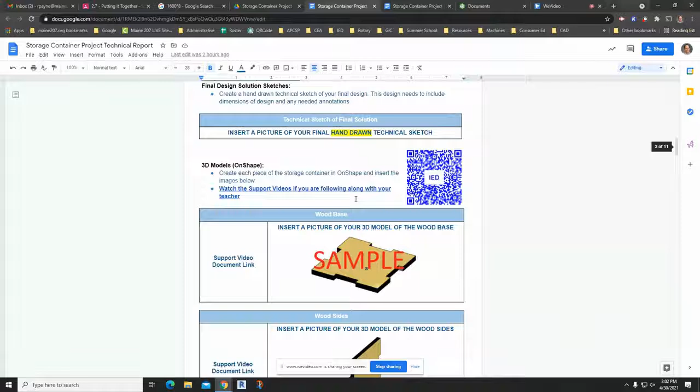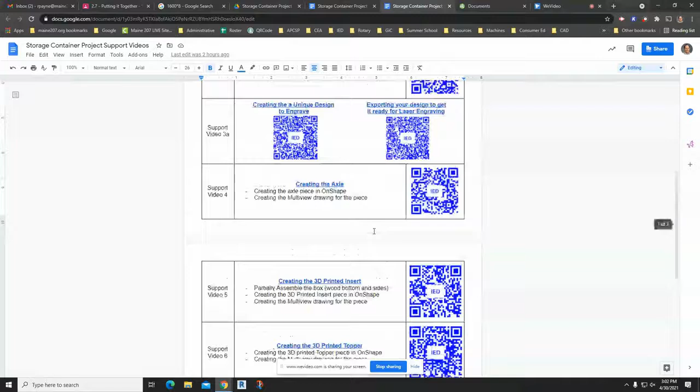So now we are finally ready to do the assembly in Onshape for our box. We've already done part of the assembly. If you need to find that, it's back in this video here, the 3D printed insert. We assembled the bottom part of the box, the wood bottom and the sides. If you have any questions about that, go back to this video here.

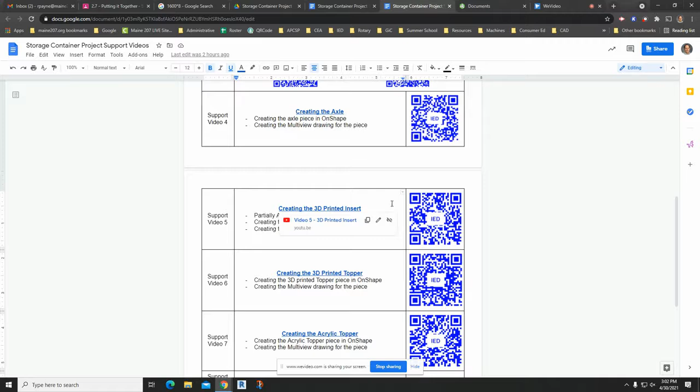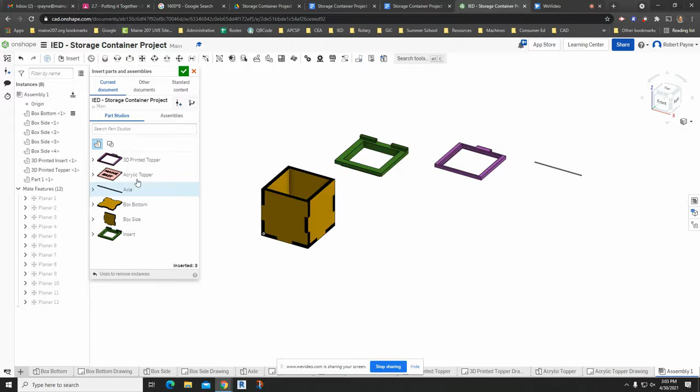Otherwise, we are going to just pick up from there. You'll see when I go to the assembly here that I have the base put in. So here's the front, and now I'm just going to put in the insert, the axle and the hinge and everything, make it all work. So I'm going to put in the insert first. Then I'm going to put in the 3D printed topper. I'm going to need the axle to help connect everything, and then the acrylic piece as well.

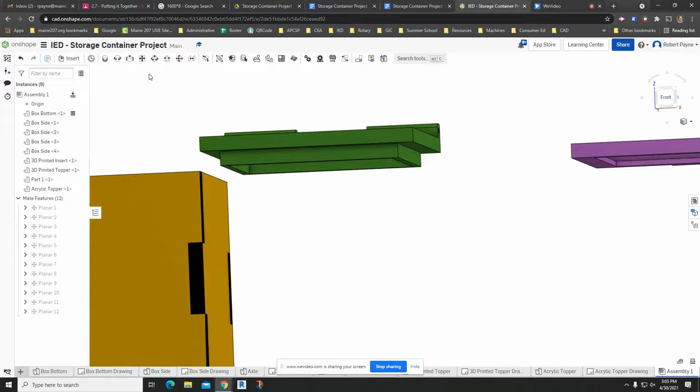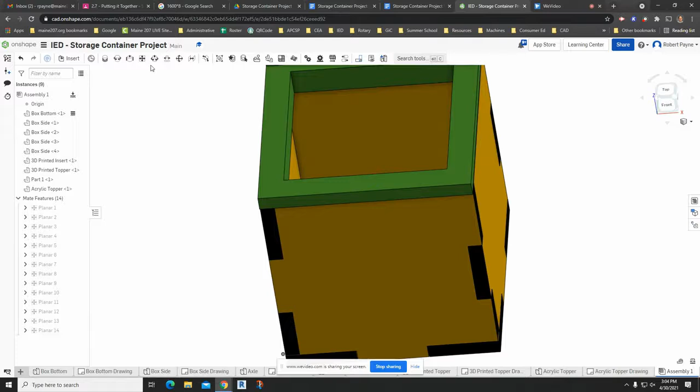This will be a pretty straightforward insert. Not quite sure, I was thinking I could do a fasten, but no, probably not. It's going to be all planar mates. So the way that'll work is a planar mate. This part here sits on top of the wood part here, and then the rest, this side here is going to be flush with this side here. And this front side here is going to be flush with that front side there. All right, and it will be anchored and can't move.

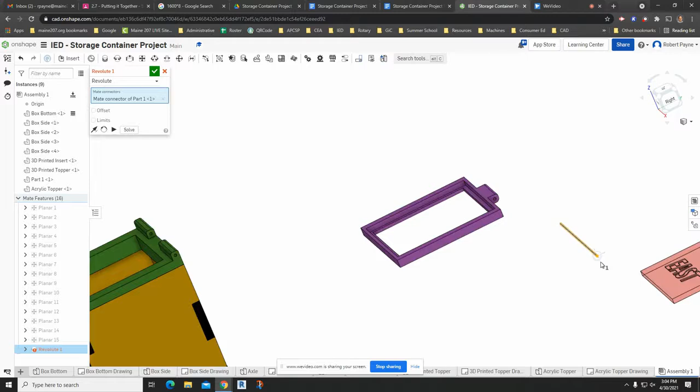Okay, let's see. Next, let's put in the axle. So that's going to be a revolute mate. Let's do the revolute mate. I'm going to do the center here with the center there. And it is undersized, or the hole is oversized, but in reality, the way the printer works and everything, it'll be a pretty tight fit.

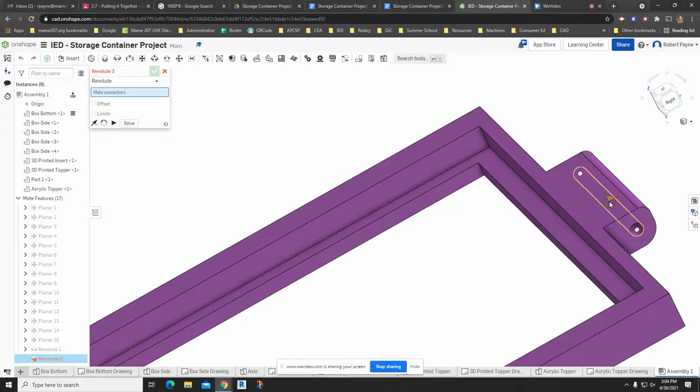And then the next one here is another revolute mate. I'll be a little more careful this time. I'm going to try to pick the center mark of this hole right there. So center there, and the center of the axle. All right, and that is actually really good.

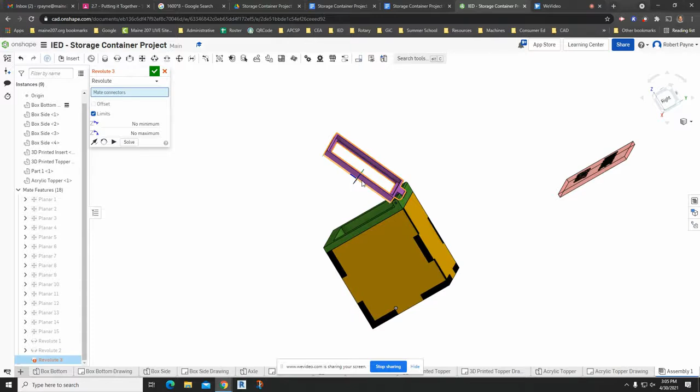It works, but again, got to take care of the over-rotation that goes into the box. So you just need to limit. Let's take a look, let's see if we can figure out what the angles are. Let's just say okay, and let's try this again.

Let's delete that. There we go, so I was looking for the angle. So let's click on limit. So 0 is the minimum, and then let's see what the maximum is going to be.

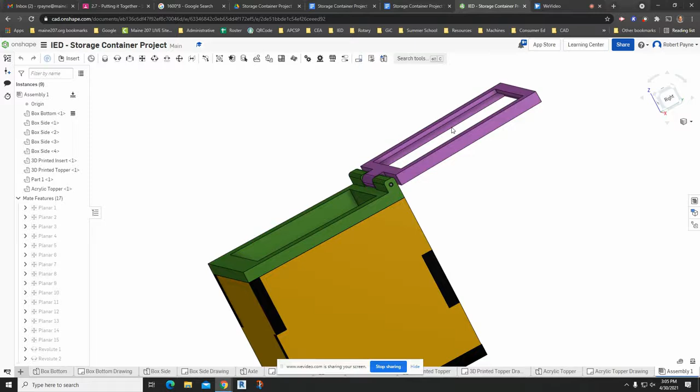Not sure what's going on here, it just wasn't keeping up. Either way, in reality, it opens up about 180 degrees. So what I'm going to do, I'm going to say limit from 0 to 180 degrees, and hopefully, okay, now it works.

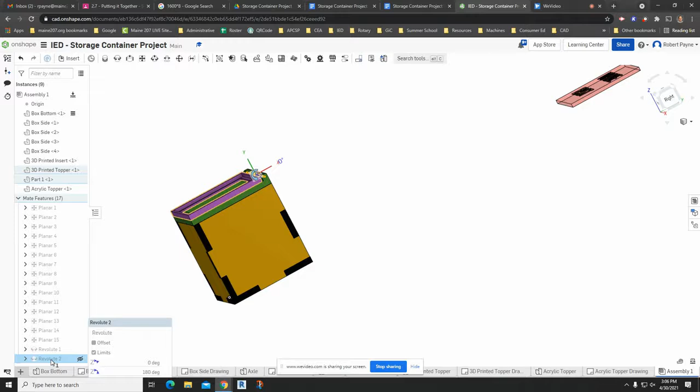What did not work there? I think because it's two separate revolutes, I'm going to have to do also 0 to 180 on that one too, to make it all work. Maybe I should turn off the limits on this one. That's just going... Why is that not... All right, I think I shouldn't have used two revolute mates. It's causing an issue, so pull this out, pull this out.

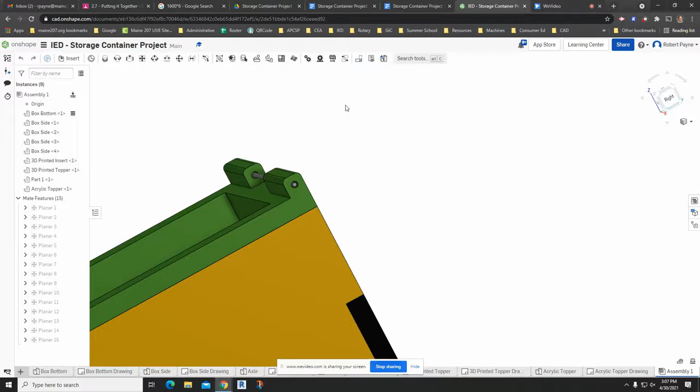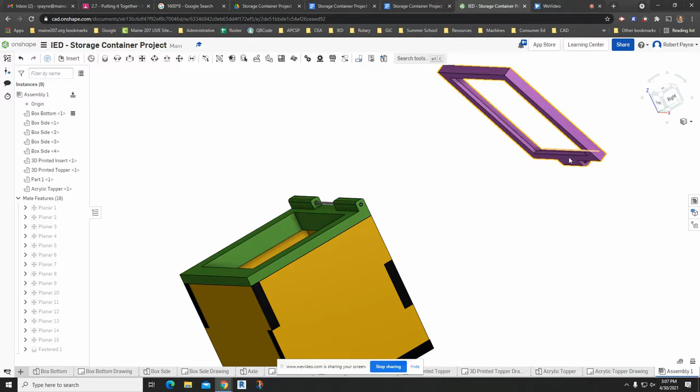Let's try this again, let's do a fasten mate. Let's try this one, yeah, this one, because that's what's causing the issue, is when I have two revolutes going around each other, that's causing the issue. So I'll do that as a fasten, and then the purple piece is going to revolve around the axle. So again, grab the center mark there, and carefully select the center of this hole.

It's going to be a tough one to choose. Oop, there we go, now I had it. Now I should be able to, so let's close out that, go back to revolute 1, and let's do limits from 0 to 180. And now it should be, yeah.

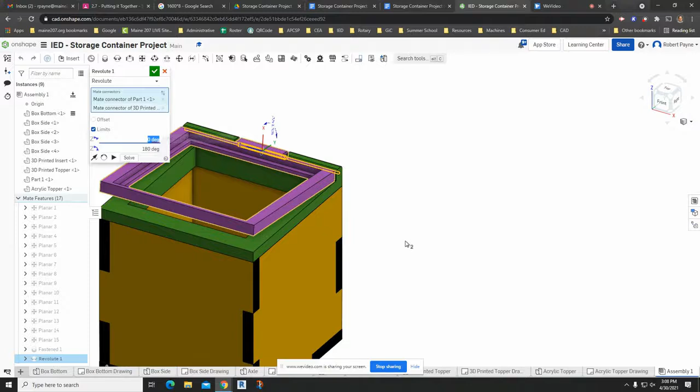Oops, okay, so I'm going to need to, I just guessed at that, and obviously I guessed wrong. So let's check these limits again. So that's going to be a 90, and it's probably going to go from 90 to 270, that's down to 0. Oh okay, so it's going to be a negative 90 to a positive 90.

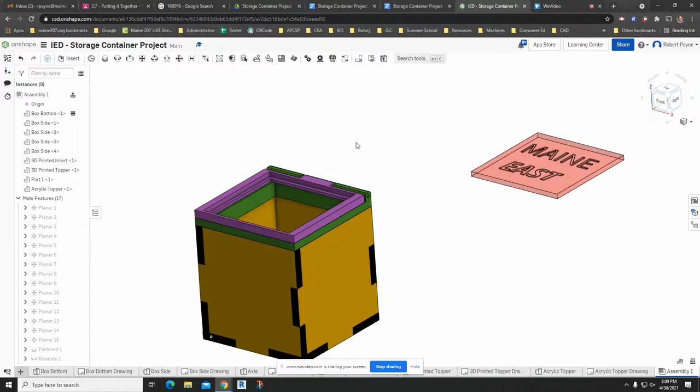There we go. All right, and then the last mate we need to do is we need to bring in the acrylic top piece into there. So mate the bottom of that with the top of this that it sits on top of. And then slide that out so I can mate that again, here with here.

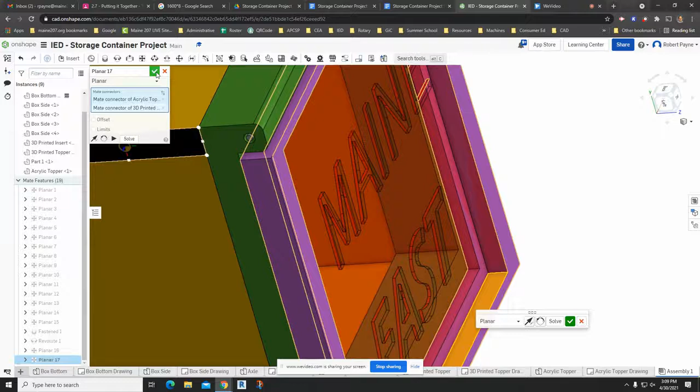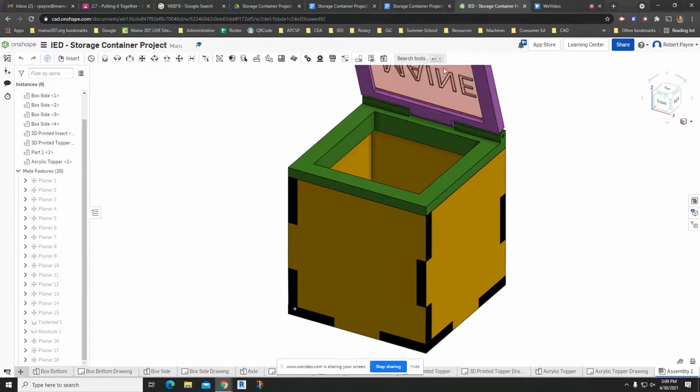And then it can still slide sideways, so this inside edge here with this inside edge here, or face, I should say. All right, kind of weird view there, and now there we have it. Okay, now it opens and closes the way it should. That's it for the assembly.

Now we're going to go ahead and put together the bill of materials. Click on the bill of materials table. Remove the quantity, remove the, actually no, I'm going to put the quantity back because I have repeated parts. So I want name and quantity, because the box side comes in 4 times.

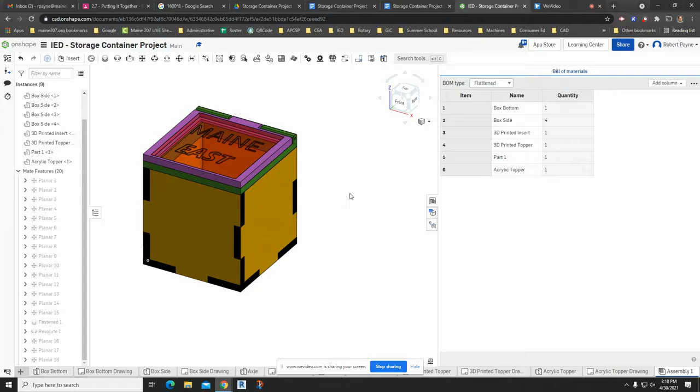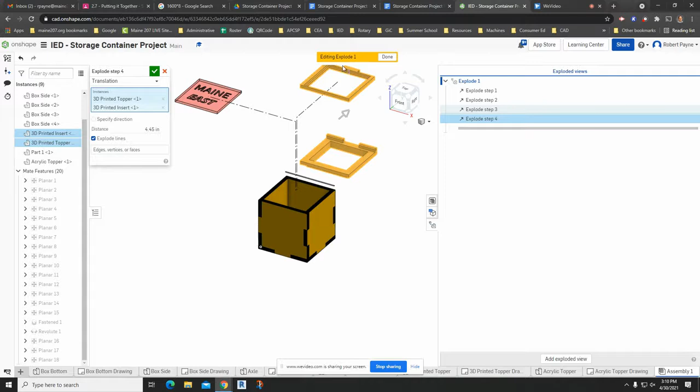Go to the exploded view, add an exploded view, and then just kind of move stuff around. I'll move that, and then that. Take this piece off, bring that up. And there. Now the insert, take that up.

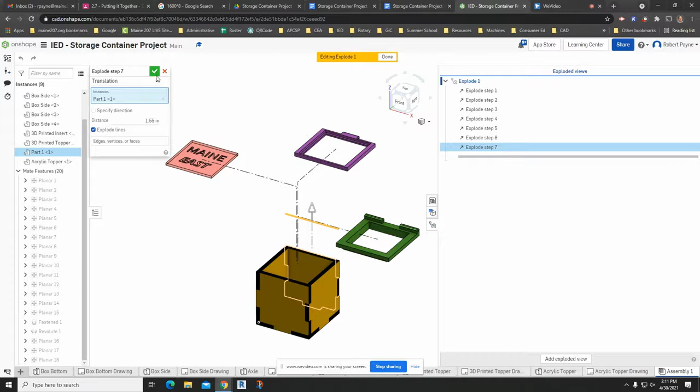And I'm thinking from there, I'll move it that way. The axle, I'll bring up to here. And then just take the sides apart. Move that one back a little ways. This one goes here, and this one goes here. And then the bottom goes down. Okay, there's my exploded view done.

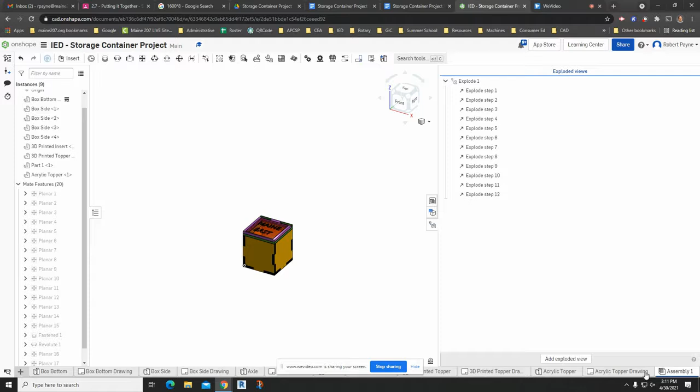So I can do the assembly drawing now. Create drawing, assembly box, always use the ISO view. There we go, that's the box. And then I'll do the exploded view.

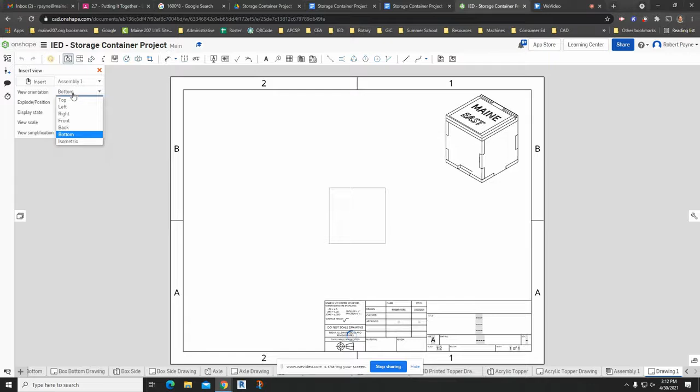Insert the, oops, isometric exploded view. It's probably going to be too big. Yeah, it's not going to fit. So we'll do 1 to, not 1 to 1, 2 to 1. Getting even worse. There you go, 1 to 3.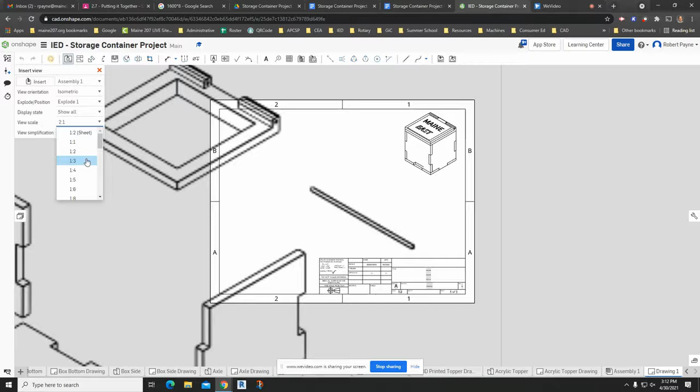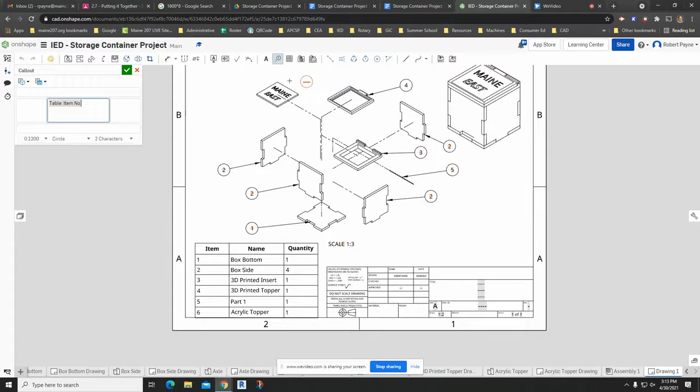And then finally, let's see, bill of materials table. That goes down here in the corner. Call outs. All right, show that as shaded view. And that will be the storage container assembly.

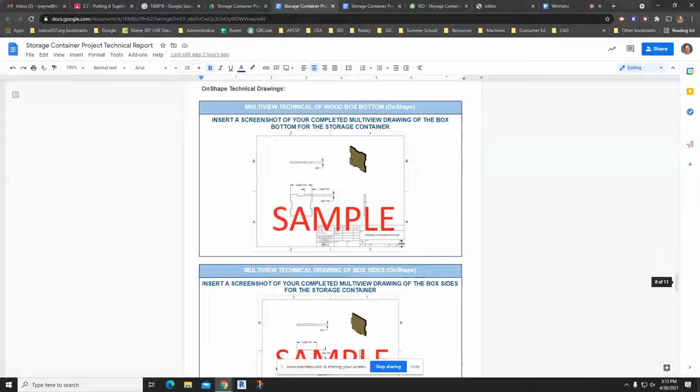Go ahead and print that and put that in your document. So take a screenshot of just the assembly and then the actual assembly drawing, put that there. If you have any questions, please ask your teacher.